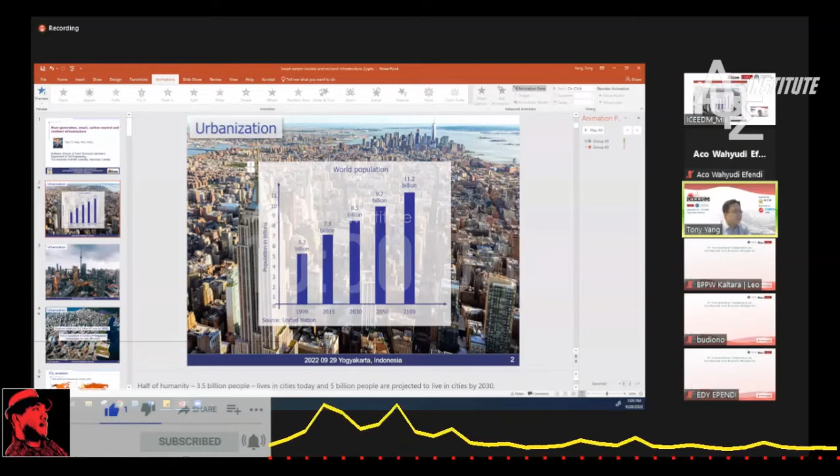Okay, very good. This slide shows things very fast. Right now, it's 2020, our global population is about 8.3 billion people. We're expected by 2050, about 20 plus years later, the population will grow to 9.7 billion people, and these are the data presented by United Nations. So this increasing amount of population we are seeing started showing rapid urbanization worldwide.

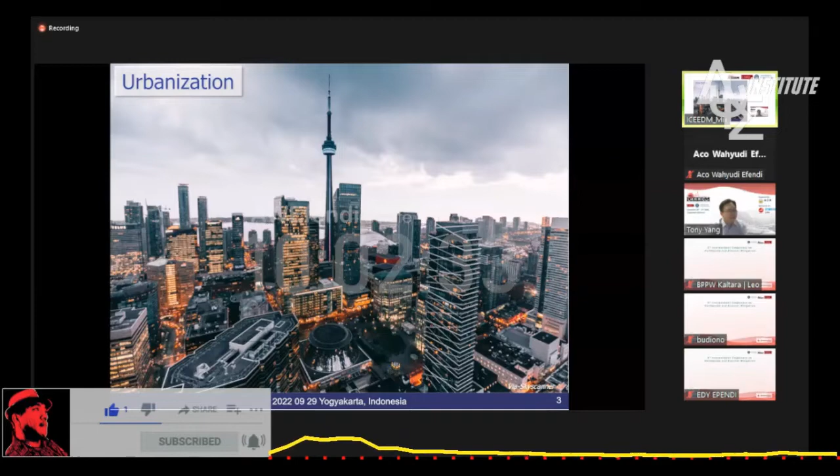With so much population growth worldwide, we're expecting to see a lot of new infrastructure need to be built. It is expected about 2.1 trillion square feet of new construction need to be built by 2050. So for many of us, we don't really use the unit of trillion square feet. Just so you know, Jakarta is about 800 square kilometers. Singapore is about 700 square kilometers. So 2.1 trillion square feet means that we need to rebuild or build 9 Singapores every year around the world for the next 30 years. So there are a lot of constructions need to be built, and these constructions are creating global warming worldwide.

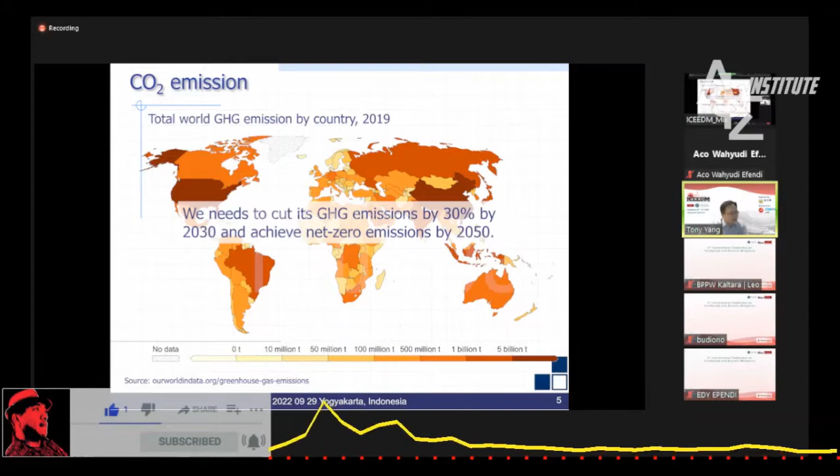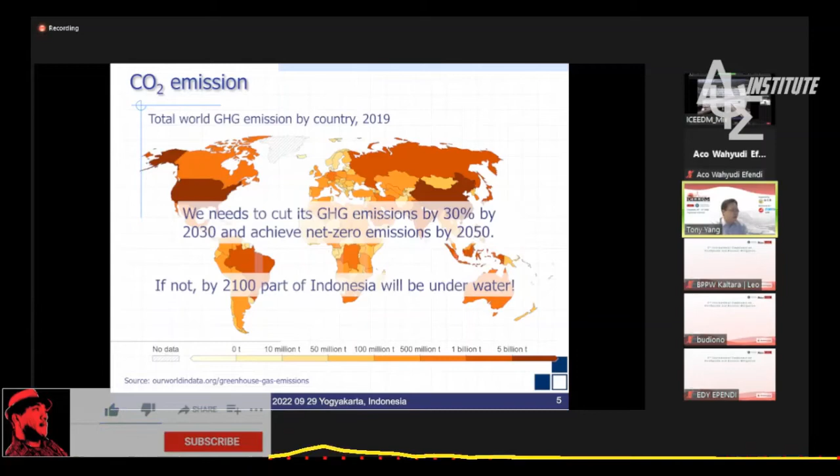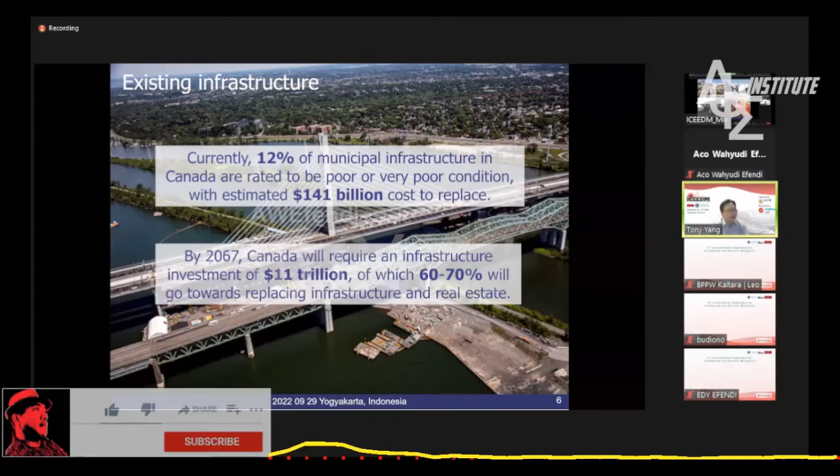In addition to this population growth and maintaining infrastructure, we're also seeing our infrastructure experiencing lots of financial losses through natural disasters: earthquake, windstorm, fire, flood. We see this all the time. Within the period between 1998 to 2017, less than 20 years, globally the economic loss for infrastructure reached close to $3 trillion US.

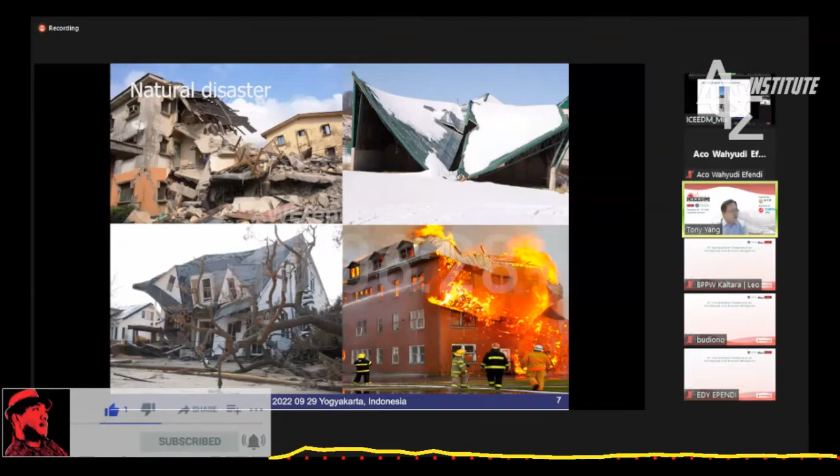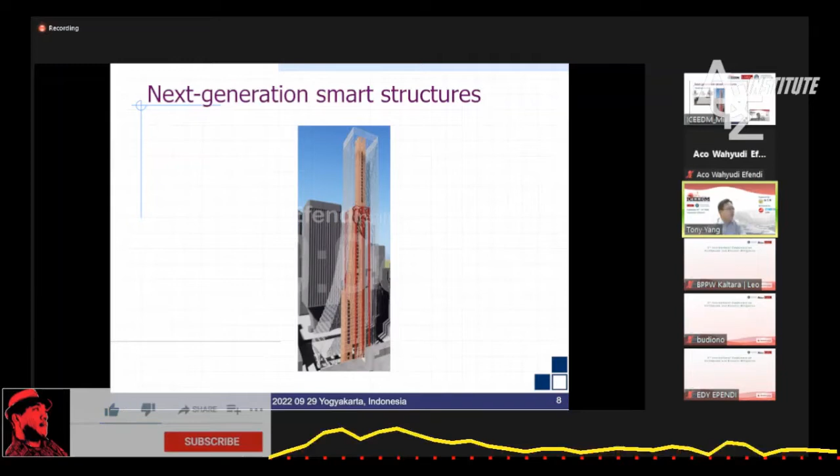So the next generation infrastructure that we're focusing on developing uses a new way of construction. We pre-make components in a factory and quickly assemble on site. We're developing 3D printing technology to allow this. We're reusing recycled material and using mass timber material to reduce the carbon intensity of new infrastructure.

At the same time, we want to make sure those infrastructures have all the technology we can to make sure they are safe for the next earthquake. So we started developing energy dissipation devices. Finally, we use real-time monitoring, so the next generation infrastructures are smarter, carbon neutral, and resilient. Back to the pictures we see, the conventional constructions - this is a picture in the United States, but no different in many other places.

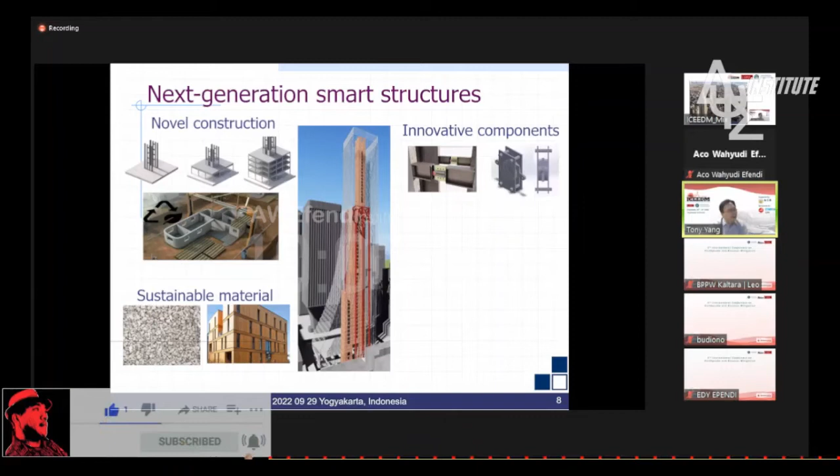We lack skilled workers. In North America, we have very, very few skilled workers working anymore. Conventional construction also needs a lot of time, and you have a lot of waste in construction material, and a lot of time, very poor quality assurance. Many times it's affected by the weather and lack of construction sites for us to build.

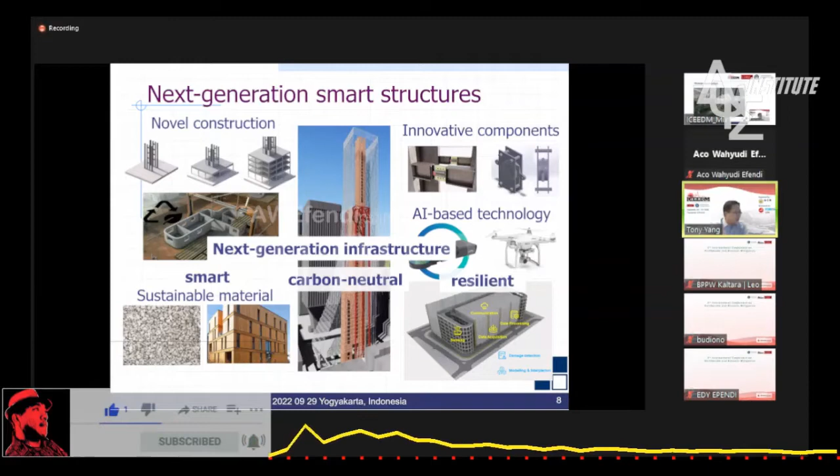So over the last 20 plus years, the world started developing newer ways of building faster to meet global demand. This is a video showing you the technology to design and assemble the structures together. This is real-time footage showing how fast construction can be built.

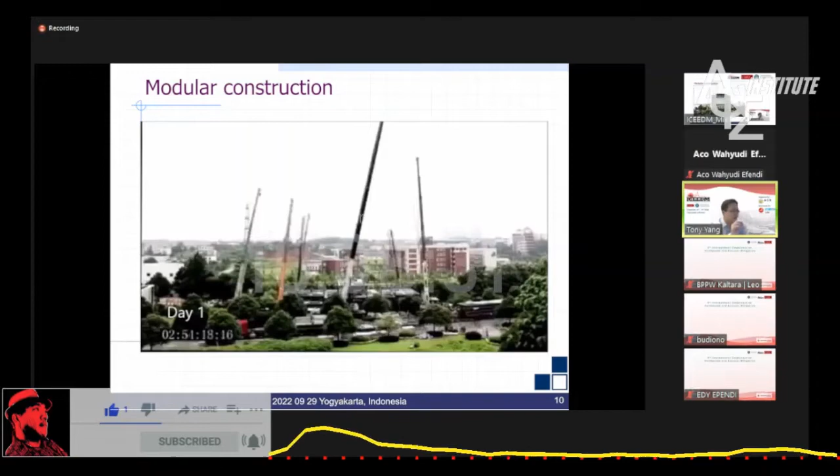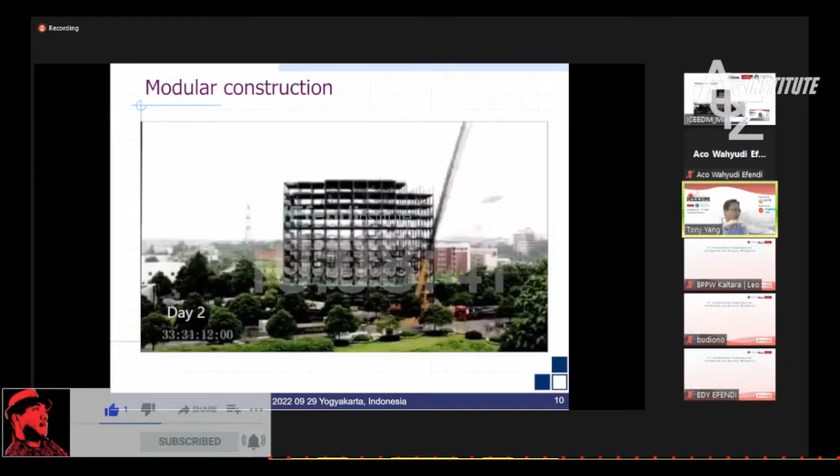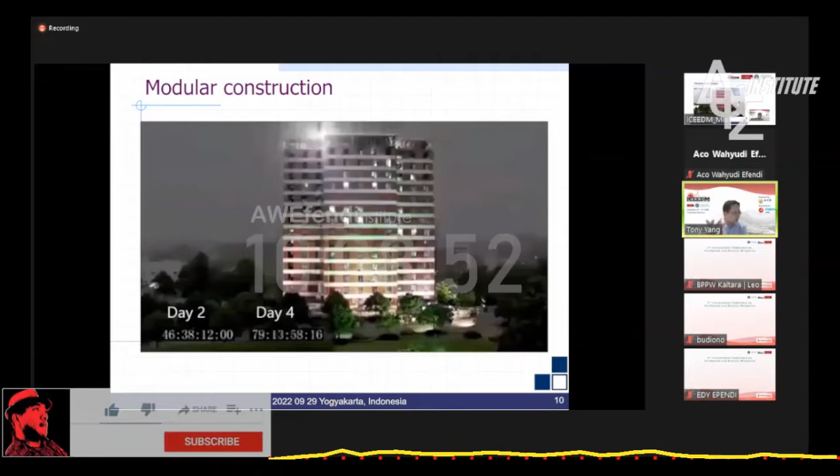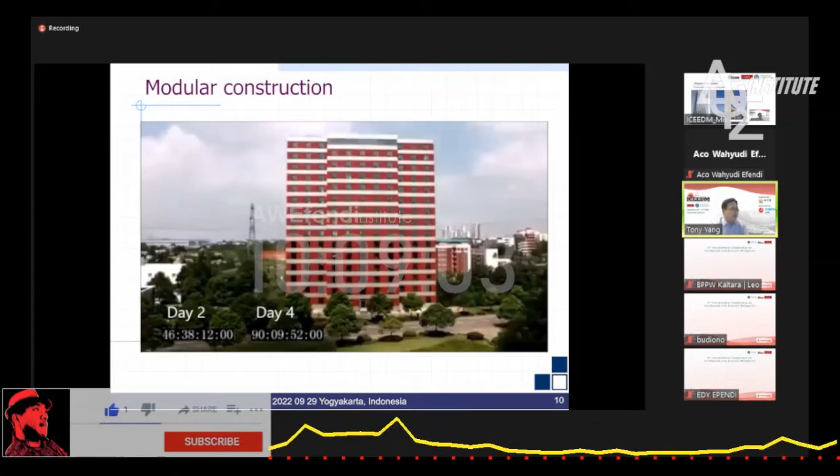This kind of new technology is being heavily investigated around the world. In fact, in China they are thinking of building the next tallest building in the world, 220 stories, using fast construction technology. Right now in China, for modular construction technology, if you don't use it, you may not be able to get a permit to build in a city like Shanghai or Beijing.

So in North America, we're developing fast construction technology. Buckling restrained knee brace truss moment frame is one of the technologies that we have collaborated on with our colleagues around the world. The idea is using a truss that you can use in regions to create large interior spacing.

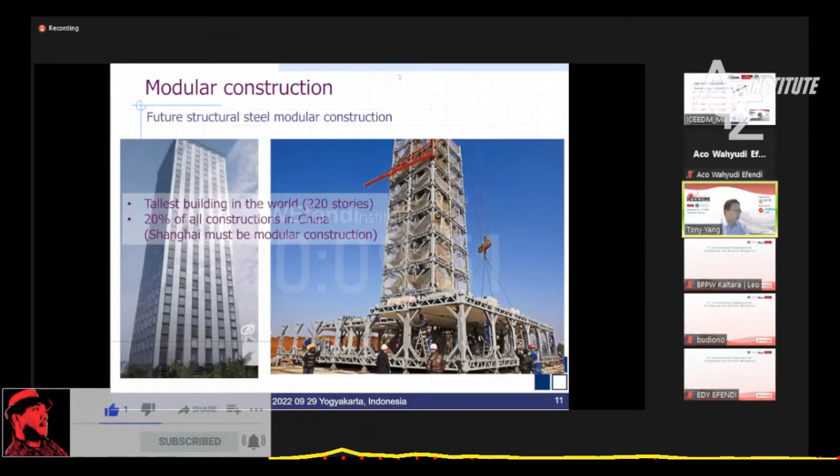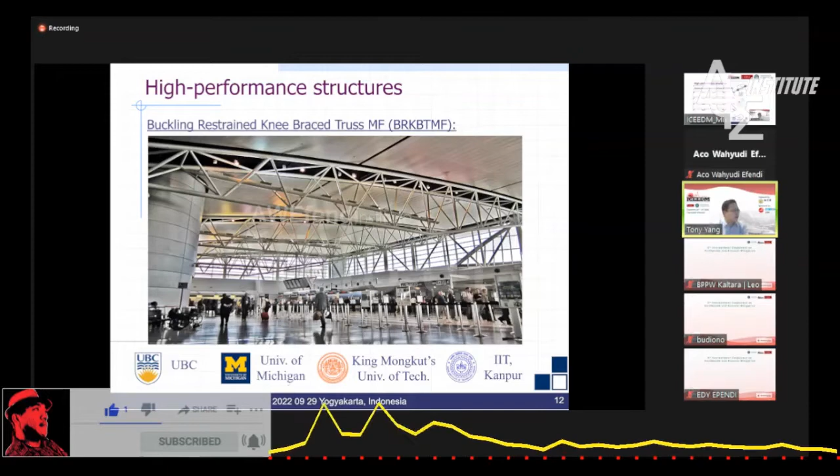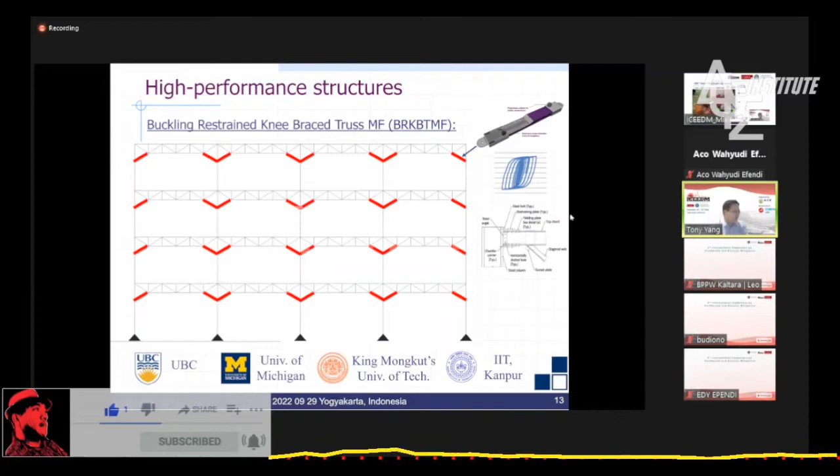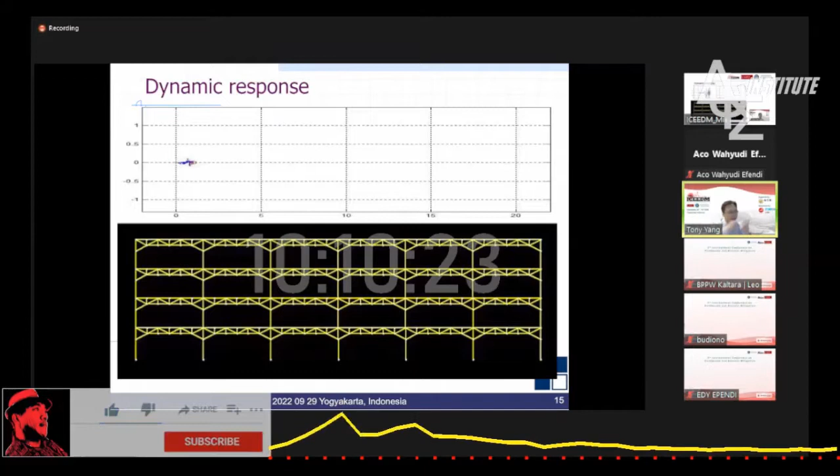To ensure it performs well during earthquakes, we started developing energy dissipation devices to dissipate energy, and we have secondary devices to dissipate additional energy. In the laboratory we tested many of the devices we developed, and we're working with Star Seismic, now called CoreBrace, to develop this damper technology. We developed simulation models to demonstrate that the structure can work well during storms and earthquake shaking, so the device can yield and dissipate energy throughout strong earthquake shaking.

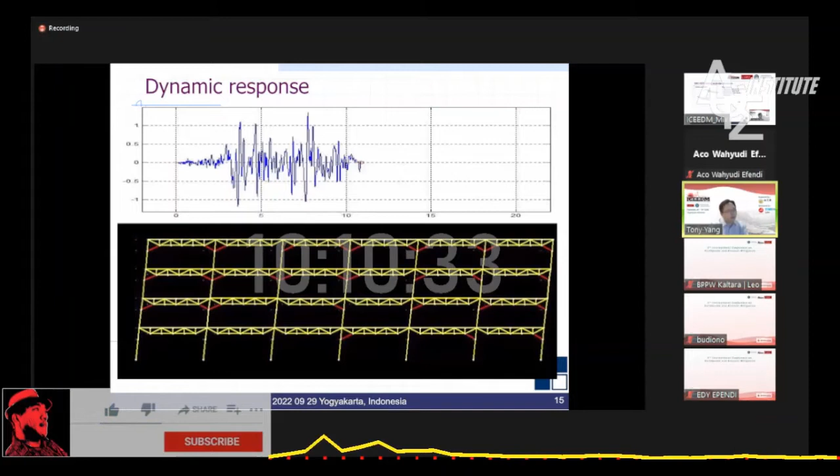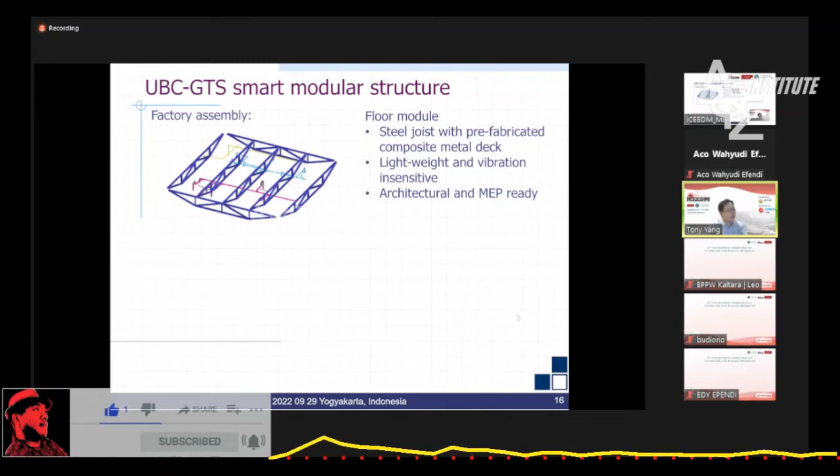After it's done in numerical simulation and experimental testing, the structural system is placed. All the electrical, mechanical, and plumbing systems are put in at the factory. We put in the floor, the fire coating, sound insulation, and fire coating on top, and then we can easily ship it to the site. On site, we can quickly place, using a very limited amount of crane and human labor, the columns and lift the floor into place, making sure it works for high seismic zones like Indonesia and Vancouver.

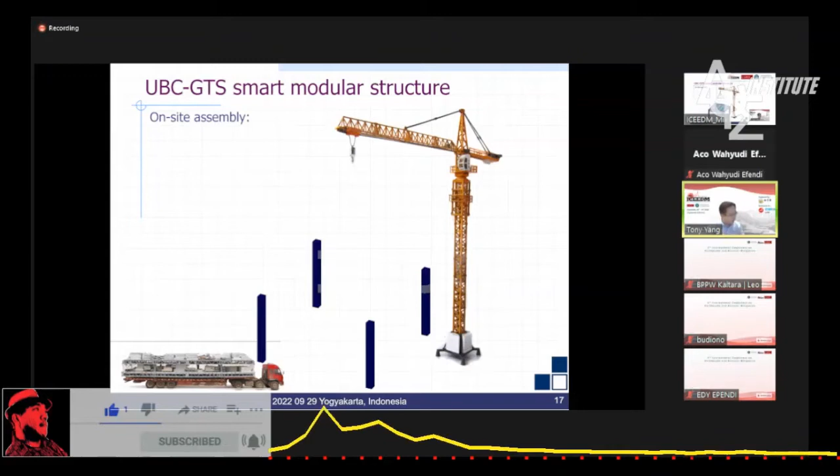We started putting in these energy dissipation devices. The structural system can be very quickly constructed using a very limited amount of human labor. The system is very lightweight, very fast to construct, and earthquake resilient, so we can easily deploy it to many locations around the world.

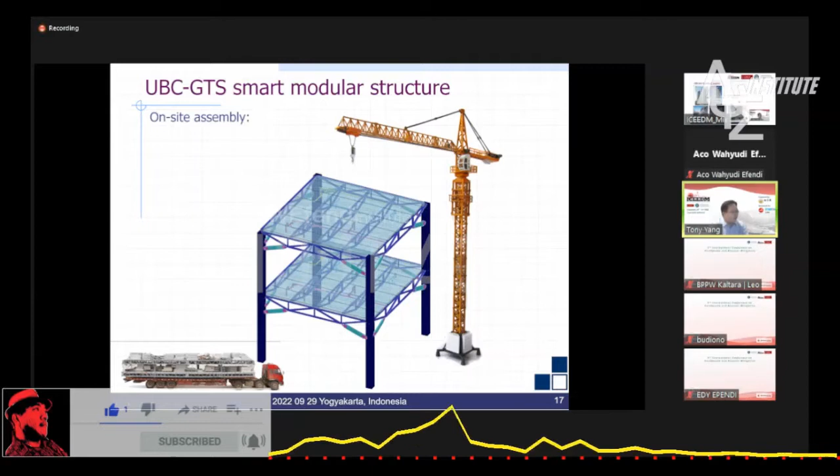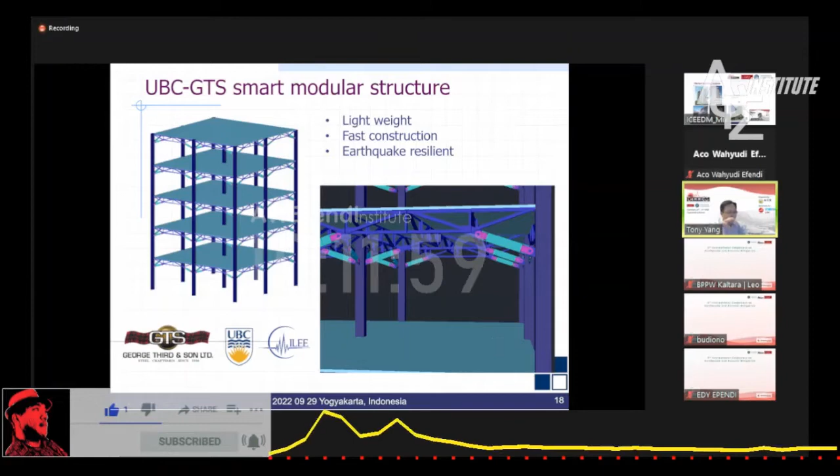The other technology we have developed here in North America is reusing shipping container technology to build housing, because we have many shipping containers left on the North Shore that we needed to reuse. Our goal is to quickly assemble them to help solve the housing issues in Vancouver.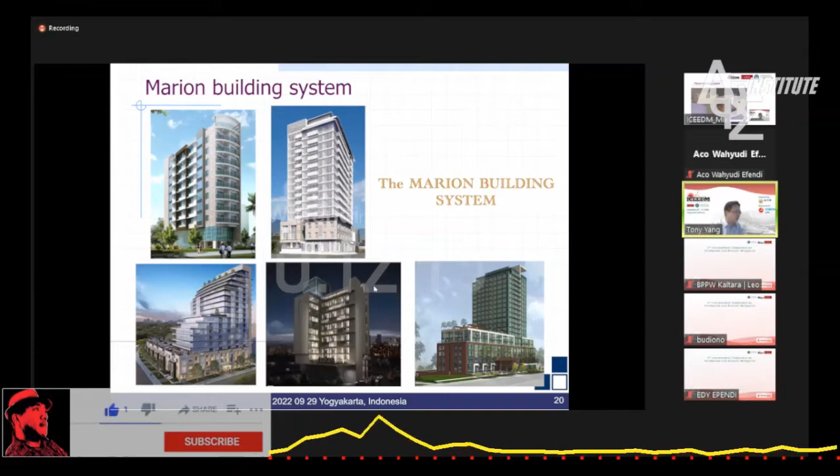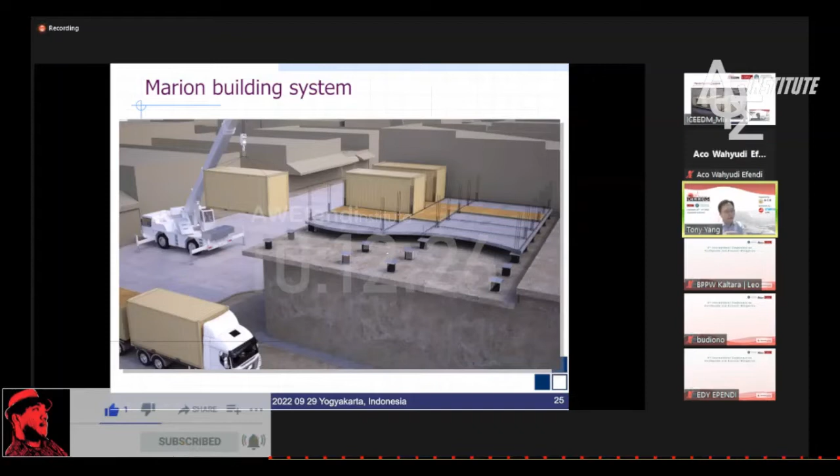So we put the shipping container in the factory. We put in the electrical, mechanical, the kitchen into the module, and we quickly ship it to the site. To make sure it works for high seismic conditions, we put the modules on top of each other, and we developed a special bonding mechanism between the modules very fast, without waiting for the concrete to cure.

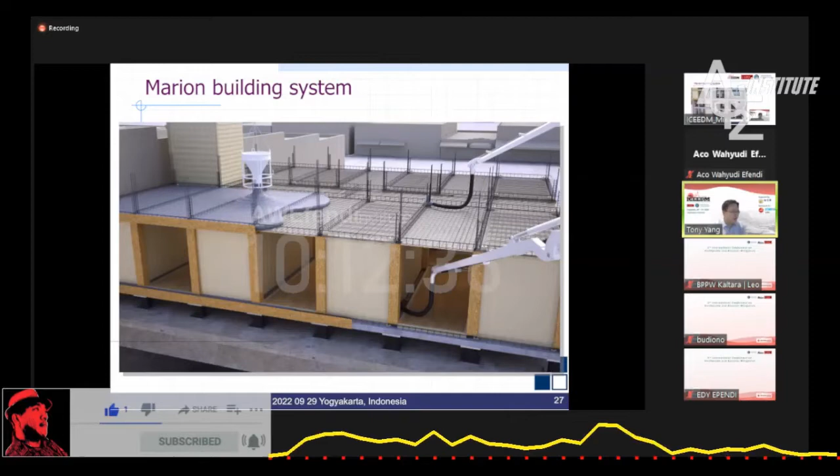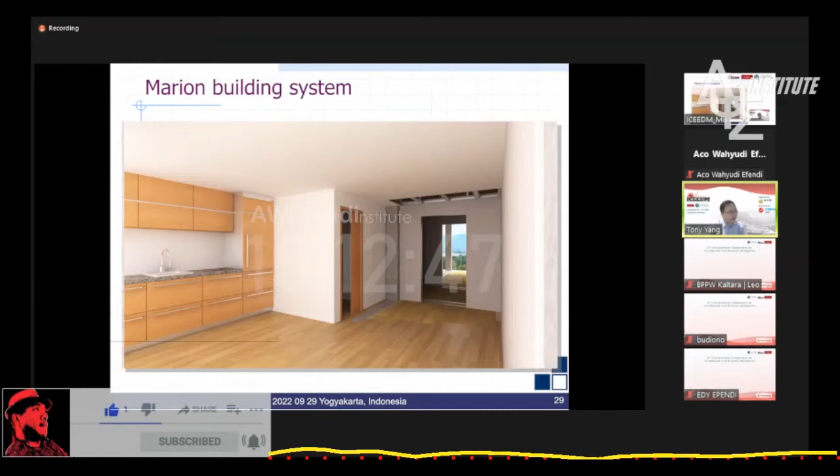Those panels fit very easily inside those individual units. They are furnished with kitchens with cabinets, water, everything running. So this is the type of construction that can quickly address the housing market.

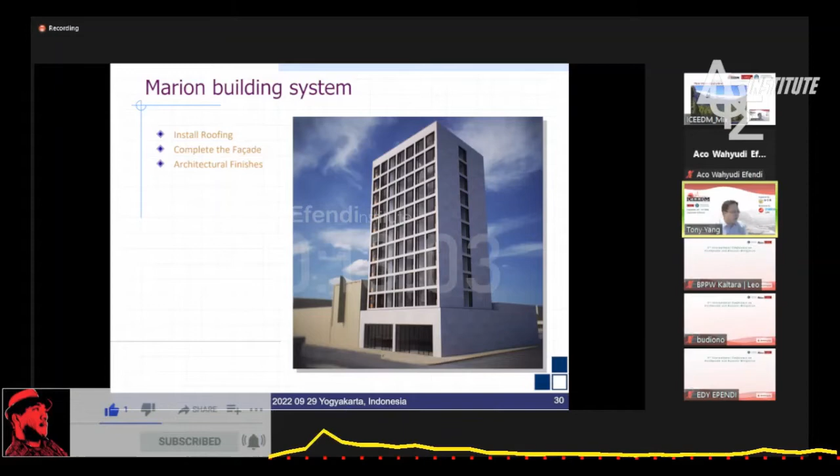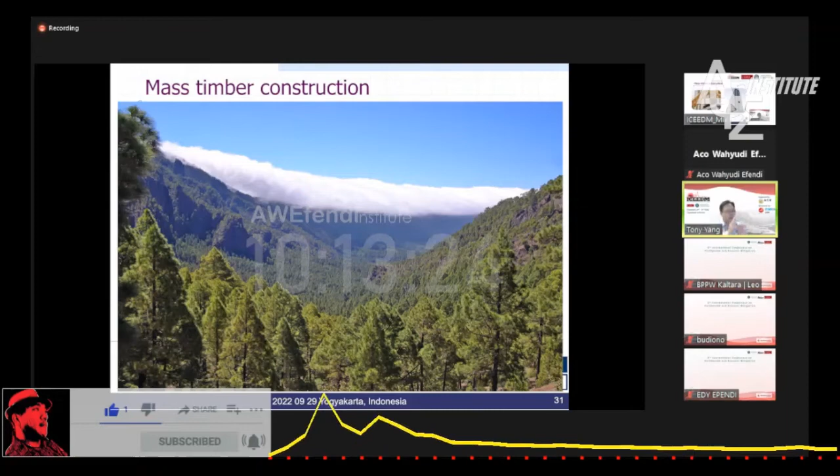Very recently, just like Indonesia, Vancouver and Canada in general have abundant resources of wood. Canada and Indonesia are both countries exporting wood resources. Very recently, we started developing high-rise buildings using timber construction, engineering the timber into cross-laminated timber so we can reach new heights. This is one of the tall 18-story timber buildings we built here at the UBC campus, and this is another project in Canada.

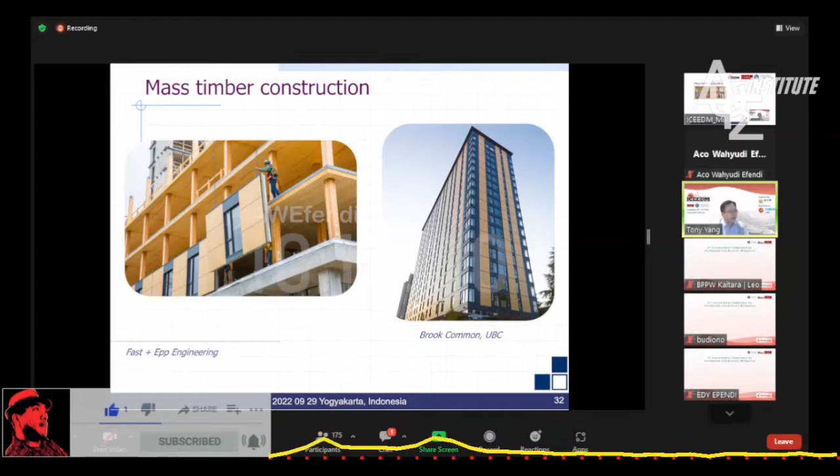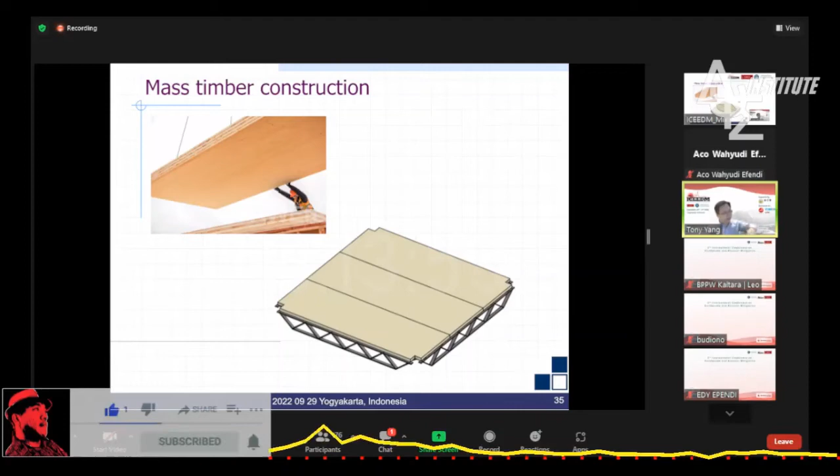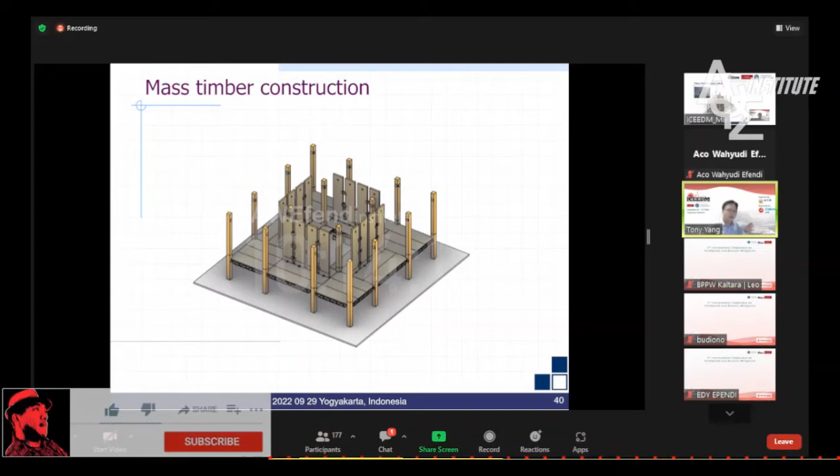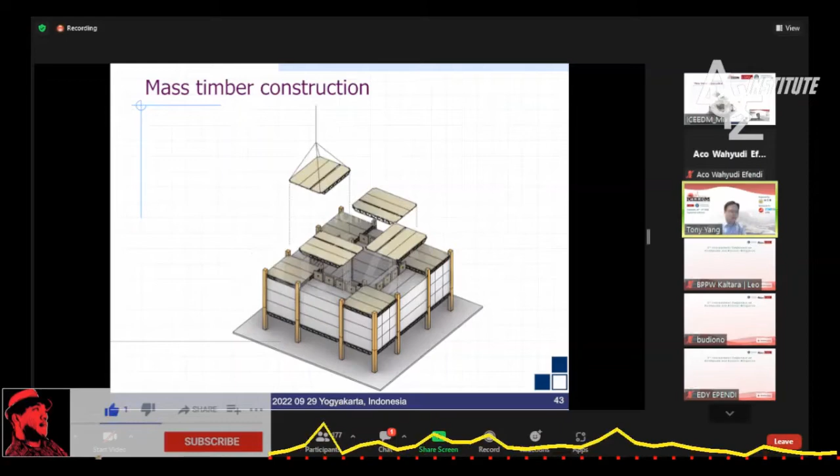Another technology we're developing involves timber glulam columns. We create a floor system which we can easily manufacture, very light, bring it to site, and assemble. After we install all systems into the pre-located slots, once one floor is done, we move to the second floor and continue. For the interior finish, we developed volumetric modules that we can quickly insert into the building, then continue with another floor system, finishing our high-rise construction.

Very recently, at this particular conference, we presented the design of a system using CLT, cross-laminated timber, with a self-centering conical friction damper we developed here at UBC, which is damage-free after an earthquake, and the building will self-center once the earthquake is done, providing very nice, stable energy hysteresis.

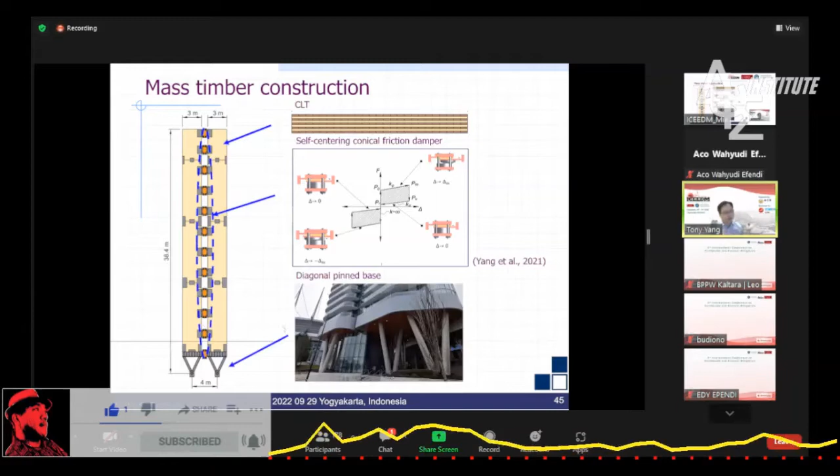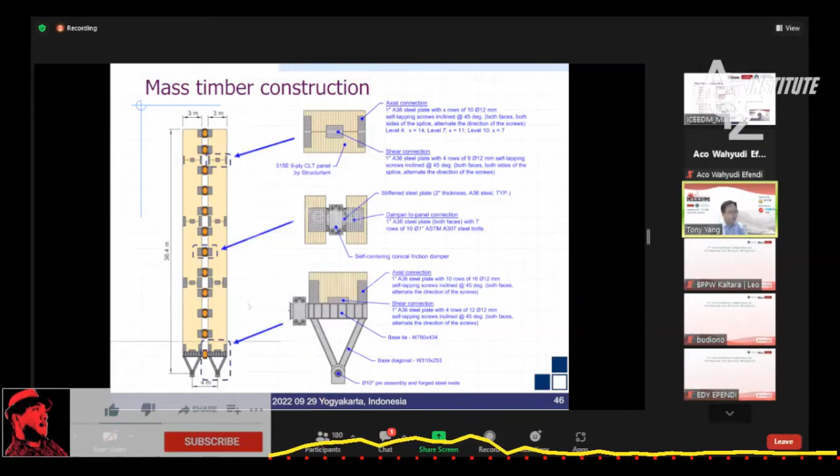At the base, in Vancouver, we started using a lot of this pin base because our architects liked that design, so we reused them in our design. Here shows some very high-level views of the final design we did. We then developed computer models using OpenSees for static and nonlinear dynamic analysis.

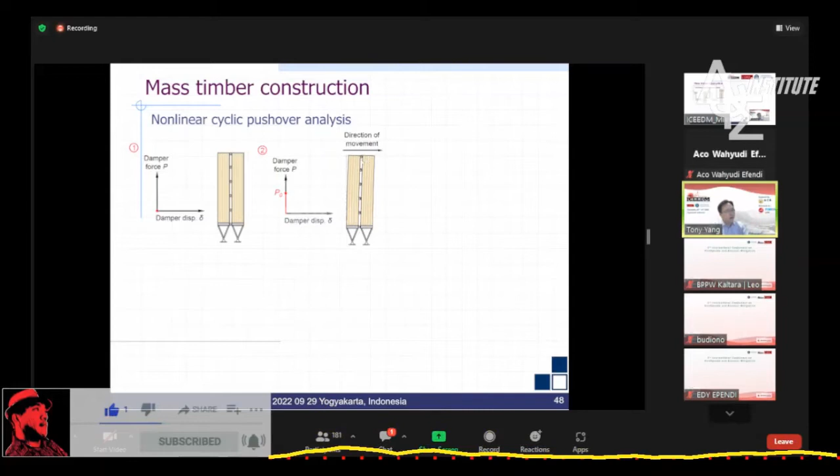In the nonlinear static analysis, we do a nonlinear static pushover, so the structure will actually deform, and the energy dissipation devices will pick up the forces. If loading continues, the devices will slide through the friction devices and dissipate energy. If the earthquake returns, the devices will have a self-centering force to bring the building back to straight without repair required.

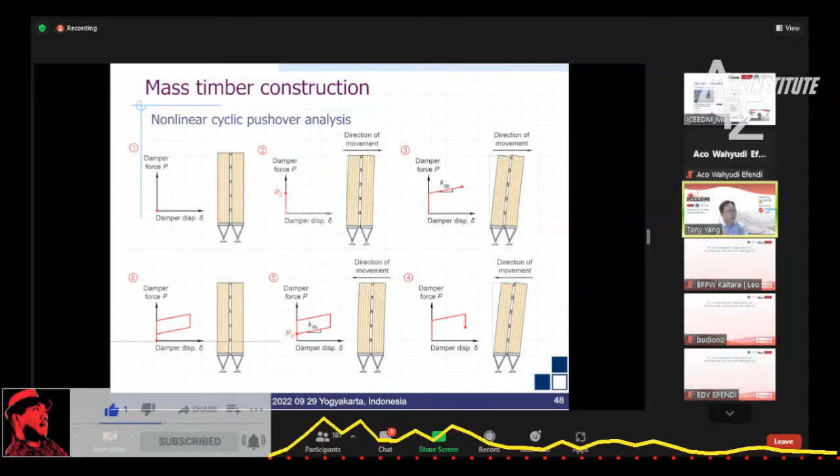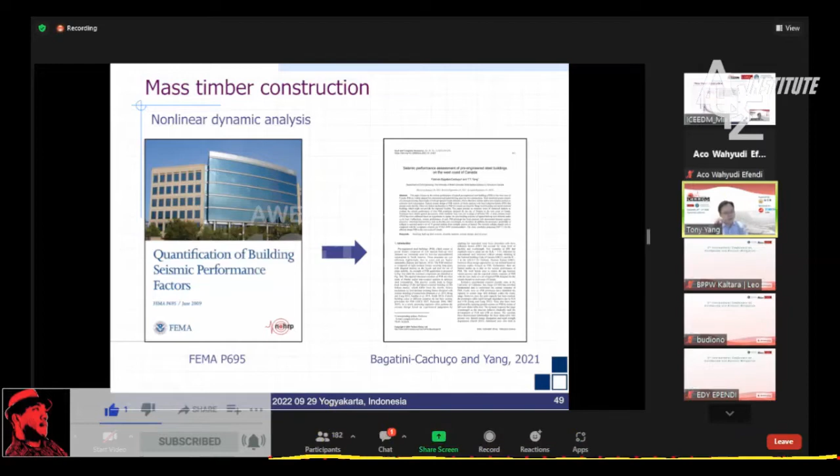After the nonlinear static pushover and cyclic pushover analysis, we then do nonlinear dynamic analysis, running lots of time history analyses using the incremental dynamic analysis procedure. We select a whole bunch of ground motions suitable for the particular site, which is in Vancouver.

The time history analysis demonstrated the energy dissipation device was able to dissipate energy and come back plumb without any residual displacement. From the large array of nonlinear incremental dynamic analysis, we pushed and increased the level of shaking until the structure reached yielding in one of the devices, without allowing the failure mode. By doing so, we can quantify the performance of the building using probability of collapse.

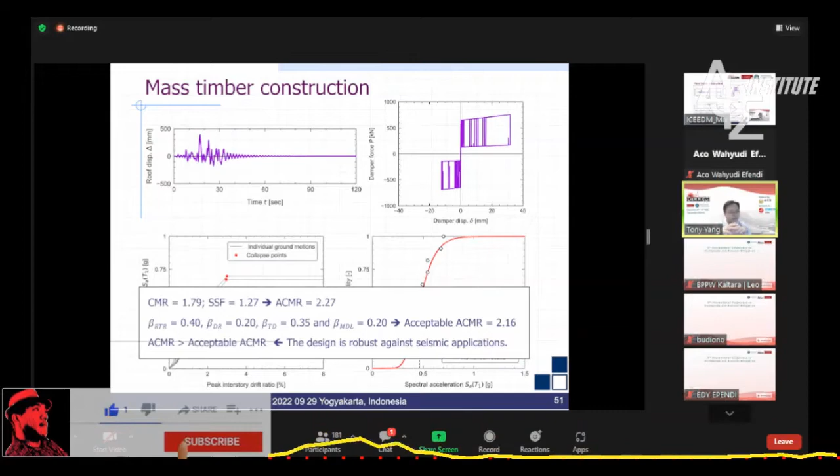In that situation, it's actually not collapse, this is a failure probability. Based on the study, the structure has a collapse margin ratio of about 1.79. What this means is that at 50% of its capacity, the median capacity is actually about 1.8 times its design level. If you account for the spectral shift factor, the adjusted collapse margin ratio is about 2.27, so very, very robust. Compared to the acceptable collapse margin ratio, this superior system performed very well according to the North American Code.

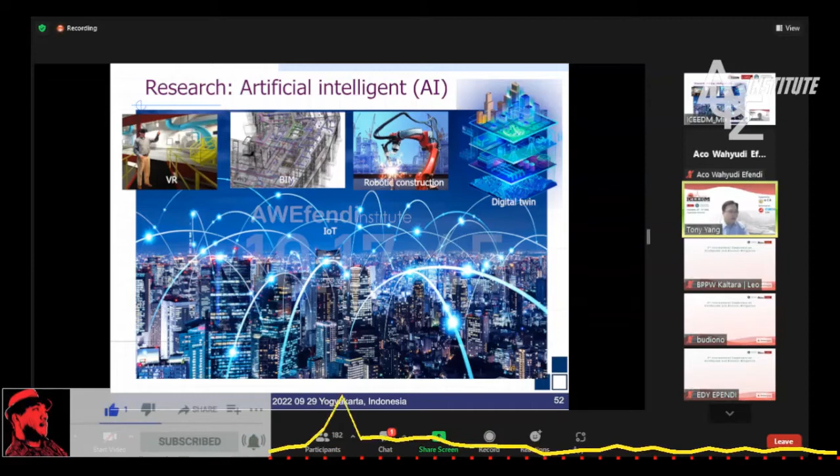Very recently, with advancement of AI technology, we started working heavily on building this kind of new structure system using robotic technology. We developed virtual reality technology, building information technology, robotic construction technology, and digital twin technology to allow us to make those buildings without much human intervention. So we are doing the structural design now integrated with our virtual reality model, so we can see everything before it's built, and we are developing our robotic technology to assemble those systems.

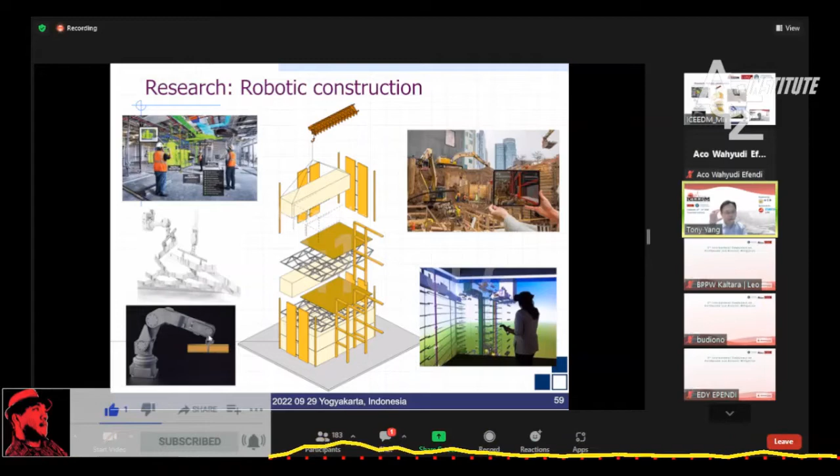Now let me give you some quick summary and conclusion.

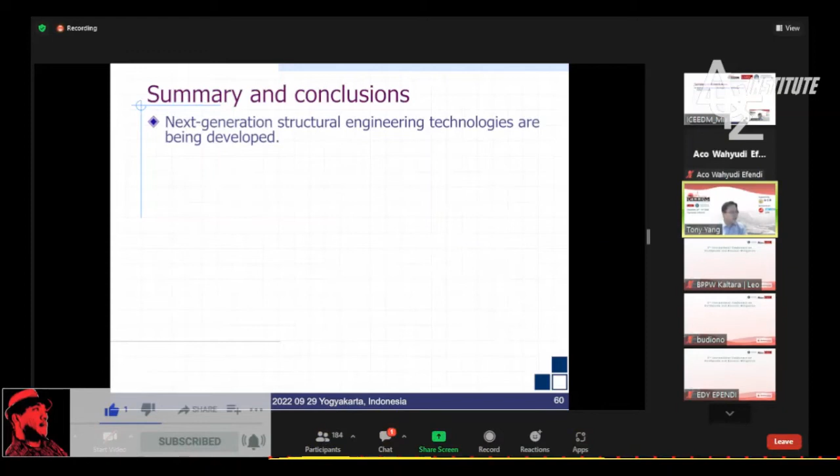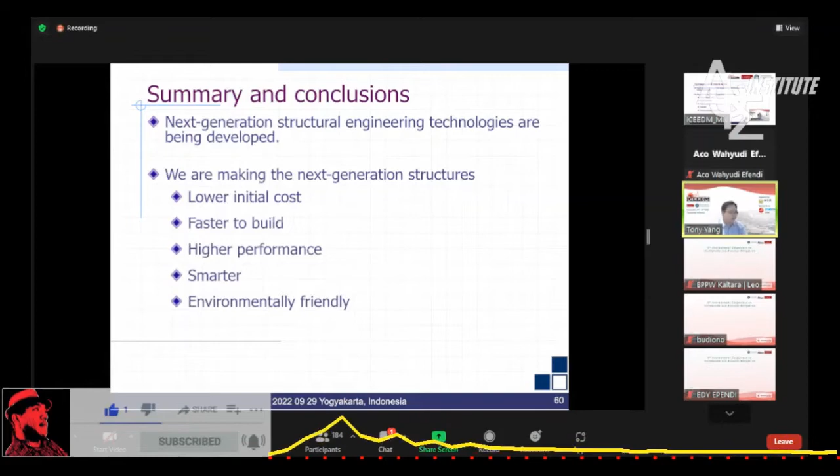Next generation structures are being developed, making them lower initial cost, faster to build, higher performance, smarter, and environmentally friendly. I'm very sure, together with our colleagues in Indonesia and around the world, we can make a significant difference.

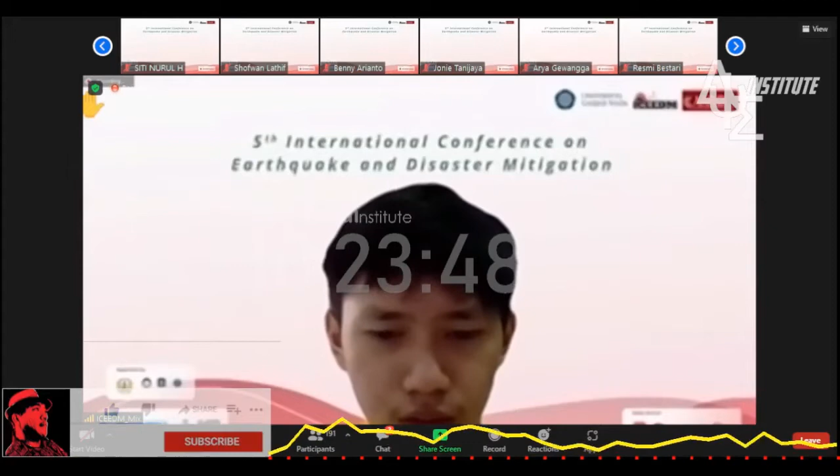Can you write your question in the chat? Yes, wait a minute, not yet. Oh yes, I want to ask about high-rise buildings in Helsinki, Finland, where all the materials are from wood. Okay, so what's your question - maybe you can read also from the chat. But the question is, I want to ask about high-rise buildings in Helsinki, Finland, where all the materials are from wood. Yeah, but what's your question - are you saying that it's possible, or what does that question mean? So my opinion, whether it's... you just give your opinion about the high-rise buildings in Helsinki.

Steven, I'm not familiar with this particular building you're talking about, but right now in North America we are building high-rise buildings all in wood. We already built one here on my campus, 18 stories, and we're pushing into 20-plus stories. So the technology is available, and we are already making them go high-rise. Is that your question?

Suppose we develop such kind of innovation in designing and building the new generation of buildings. In many countries we have design codes, we have construction guidelines that we have to follow. So how do we initiate in those situations? Suppose in Vancouver you start to build this kind of innovative building - do you need any permission, or permission from a kind of peer review or something like that, at every region where you want to build your creative building? Thank you very much.